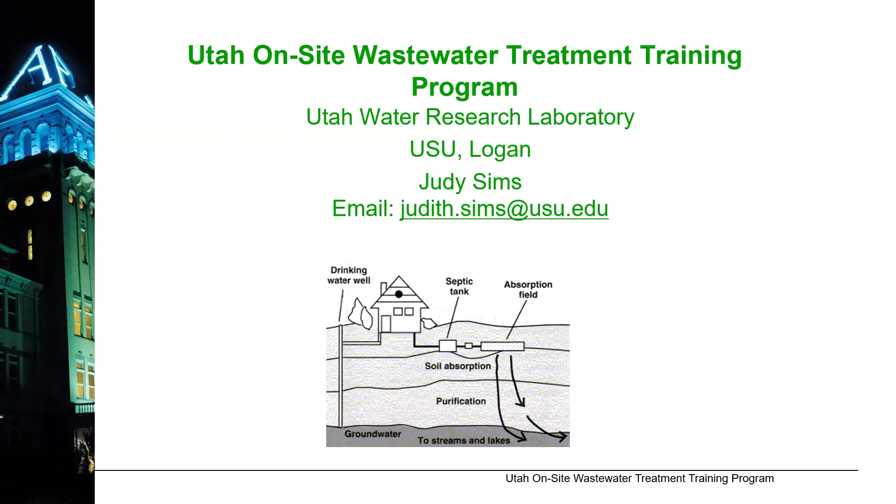So, oh, yes, please change the slide.

So, owning a septic system, compared to some of the other speakers, we've been concerned about water quality of surface waters, but here we're using human wastewater. So we're really concerned about human health with the operation of septic systems. And so if you're not hooked up to a centralized sewage system, it's your responsibility to operate and maintain your own mini treatment plant. So we take care of our wastewater, we protect you, your family, and your community. And primarily, since we're looking at human waste, we're looking at contamination from disease-causing organisms. And then, as Emily just mentioned, the effects of nitrates on infants.

Excessive nitrates in drinking water, if a baby ingests it, can change the hemoglobin to a form where the baby can't take up oxygen. So the disease is actually called blue baby syndrome. It's not good. Your baby needs oxygen, right? Okay, so please change the slide.

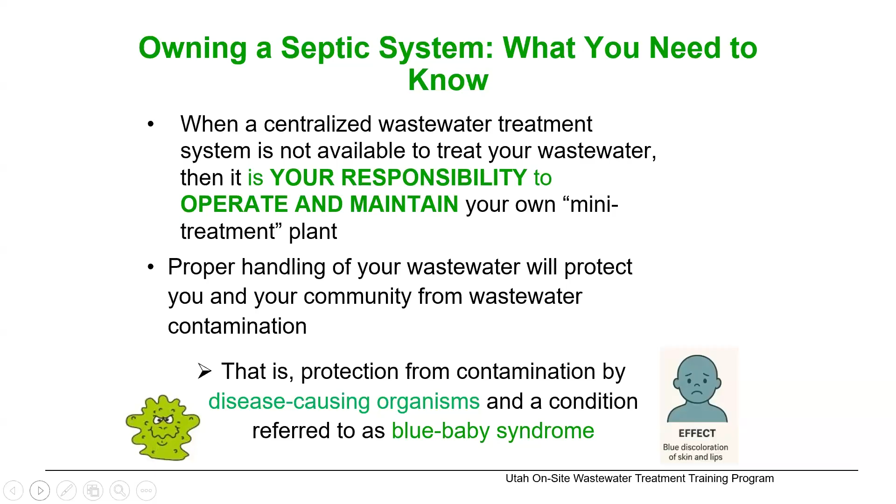So it's a treatment system. And lots of times we think of just getting rid of the wastewater, but we're actually treating it. So it comes out of the home, it goes into the septic tank, and the septic tank is the first step of the treatment where we separate out the solids. We have the floaters and we have the sinkers, and we have some anaerobic digestion, which starts the digestion of the organic materials from your kitchen and your toilet wastes. So that starts the digestion, and then it goes out into the soil.

And the soil is where the next step of treatment is accomplished. We have good microorganisms living in the soil, and they consider the organics coming from your waste as food. And so they degrade it and break it down into carbon dioxide and water. Pretty good stuff. And also in the soil, we have the absorption of some nutrients. And the pathogens, those disease-causing organisms, they can die off in the soil if we make sure they're not washed through the soil, or they can be eaten up by the good microorganisms.

So what kind of drain field do we need? We do a site evaluation. We come up with whether it's a suitable soil. So we have treatment and we have disposal. So our suitable soil in our drain field is one that's not too fast, so there's no time for the treatment to occur, and not too slow, so that it doesn't move through fast enough and it might back up into your backyard or into your home. So please change the slide.

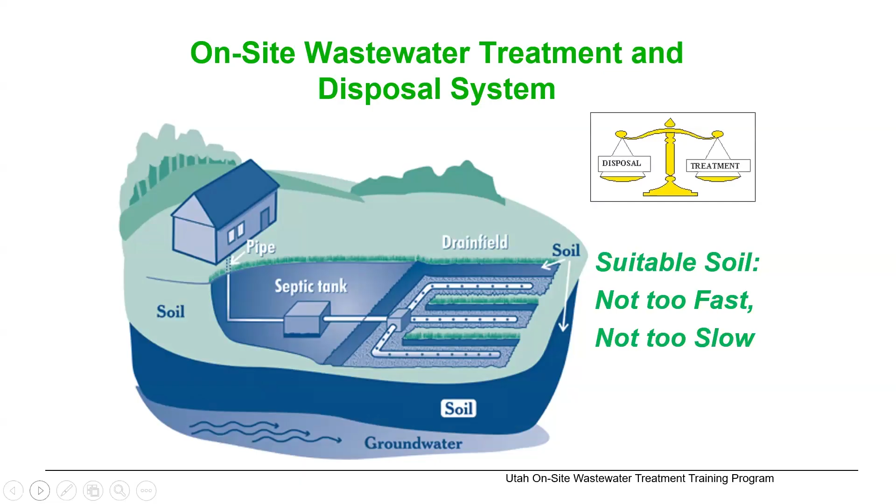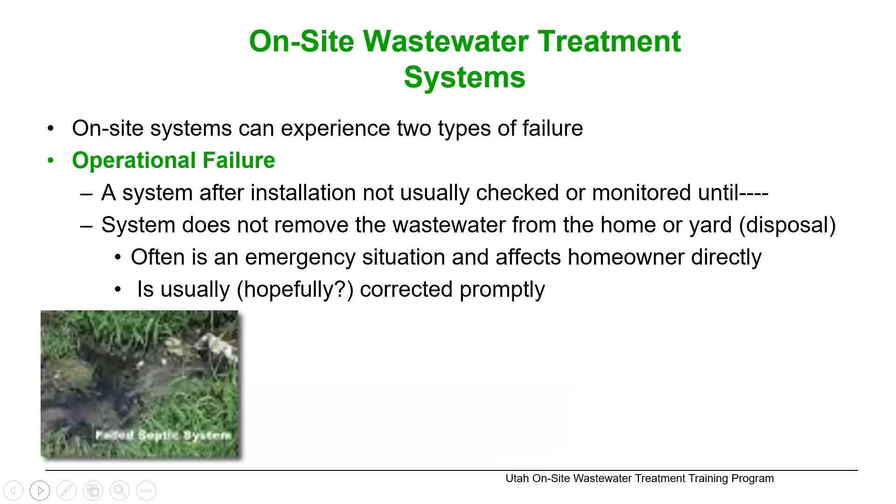And so we can have two types of failures. We can have that one where it's not disposing it. It backs up into your home or your yard. It's an emergency situation. We hope that it's corrected promptly. Another problem with this is if it's on the surface, it can then be runoff into surface waters and affect the surface waters. So that's the operational failure. The second, please change the slide.

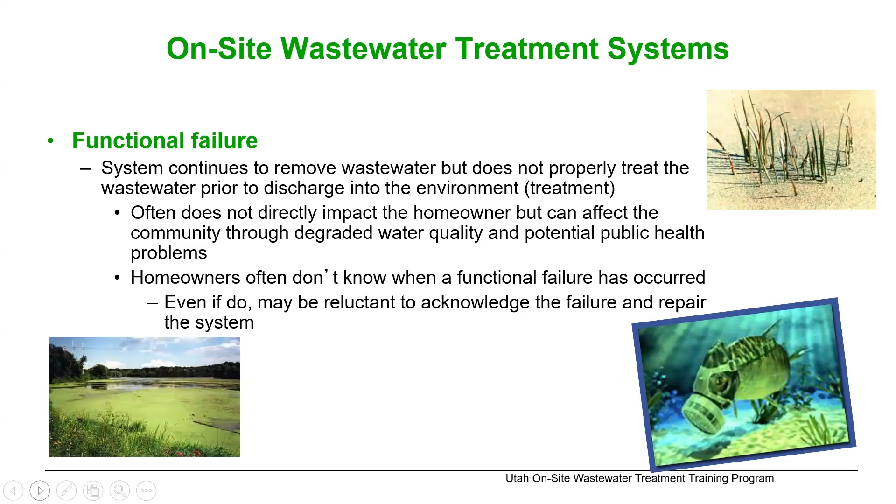And the second one is functional, where it's good for you. The water is moving away, but it's moving through too quickly, so we don't have time for treatment to occur, and we can affect the community's water quality. So you might not know this. The water's going away very well, but in some cases, if it is affecting surface or groundwaters, you might be asked to upgrade your septic system and get a more complex one that provides better treatment.

Change slide. So we have two big problems. One is the system is designed, so the person you hire to design your system, they come up with the daily maximum flow.

And they also size the septic tank based on the expected daily flow out of a certain sized home. And this maximum amount of wastewater has a safety factor to it. So we don't want to always put out that maximum amount, but we have a safety factor for Christmas when all the kids and grandkids come home or any kind of surges into the system. So that's the first thing you have to remember, is that your system is designed for a certain amount of wastewater per day, and you don't want to exceed that.

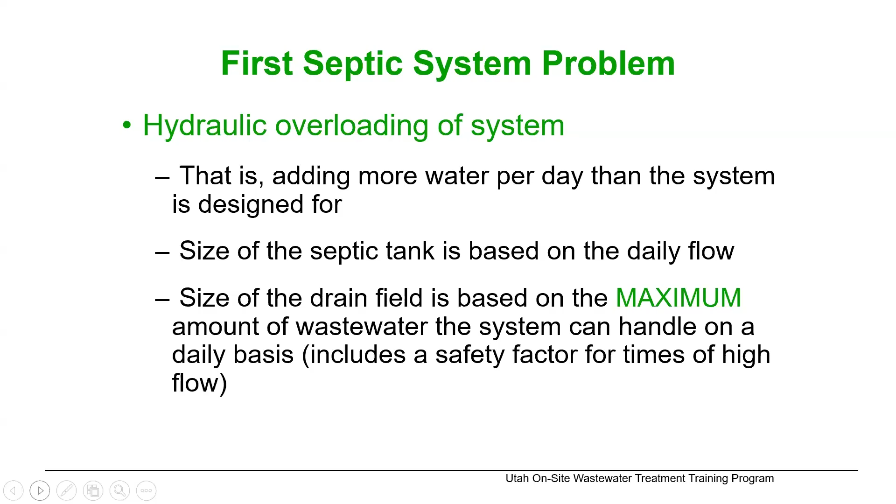Change slide. So, for example, you have a three-bedroom home, you have five people living in there. Based on the Utah regulations, it says the maximum daily flow rate is 450 gallons per day, and you would have to have a septic tank that was at least 1,000 gallons in size. So the average flow, based on lots of studies and monitoring we've done in Utah, is about 45 to 60 gallons per day. So the daily wastewater for these five people would be 225 to 300 gallons per day.

But if you have leaky toilets and faucets, that can add up to as much as 200 gallons per day. Or if you have lots of showers being taken, you have teenagers who take showers until the hot water runs out, or you do a lot of loads of laundry in one day, you can exceed that daily flow rate and then lead to system failure, both backing up perhaps or moving the wastewater too fast through the soil before it can be treated. Change slide.

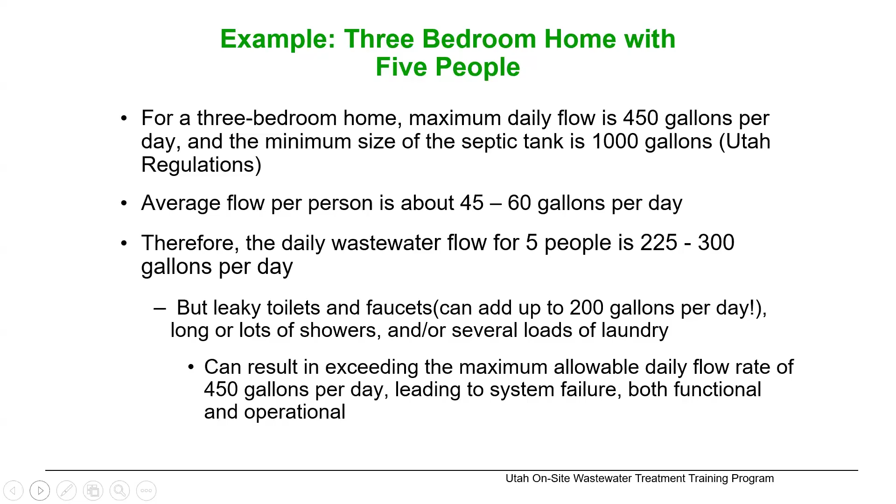And it's really important for the scum because the scum starts building from the top down, and if it slips out into the drain field, it especially has adverse effects because it clogs. You can imagine oil and grease would clog the bottom of the trenches and prevent the wastewater from going into the soil to be treated, and also it prevents the flow of oxygen into the soil.

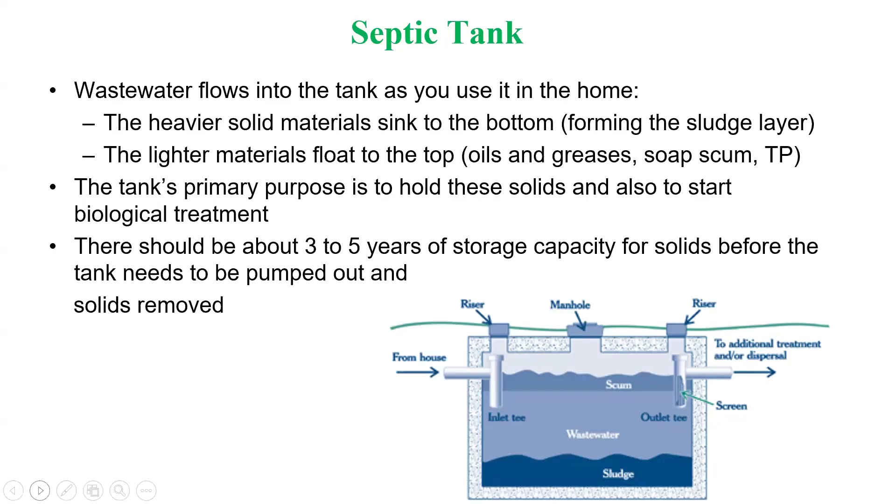So if you look at that septic tank, there's observation ports over the inlet and the outlet, and then the pumper would come and pump through the manhole. You should have risers over the inlet and the outlet so that the pumper can look and see if they have to repair those inlets and outlets when they pump it. Change slide. So the solids, like I said, it takes about 2 days, and there's beginning the degradation in the tank. So about 50% of the solids are actually broken down in the tank.

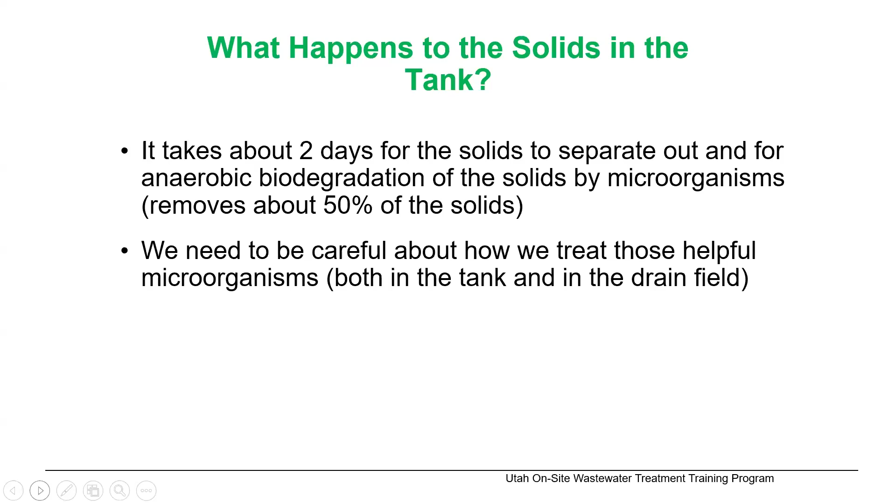And now, since the whole system is biological, microbial activity, we need to treat our bugs nicely. So please change the slide. So we don't want to use a lot of antibacterial cleaning products. We don't want to kill off our bugs. We don't want to hydraulically overload the system, so we know all about conserving water. I'm sure you have lots of information about how to conserve water.

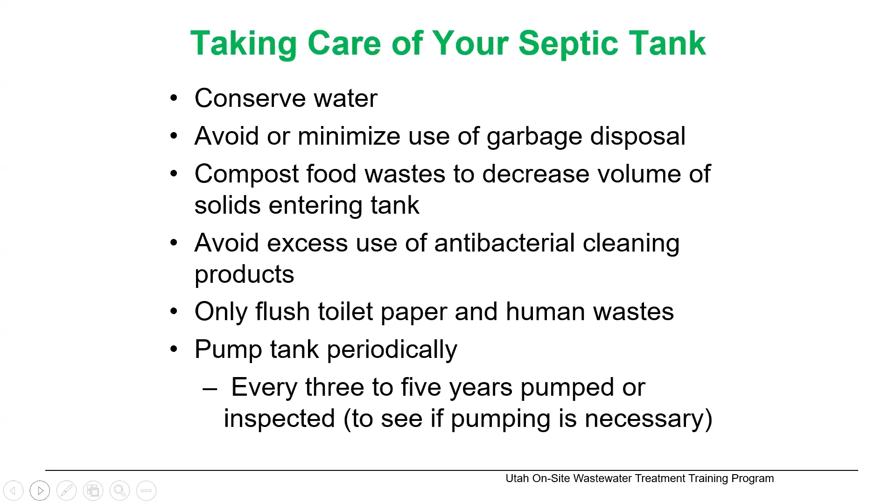We want to avoid putting excess solids into the septic tank, so avoid or minimize use of the garbage disposal. You can compost your food waste, and you can also scrape your oil from your fry pans with paper towels and put it in the trash. In the toilet, the only things you should flush are toilet paper and human wastes, and then it should be pumped periodically. Change slide. So make sure you don't dispose of any non-biodegradable solids into your septic tank.

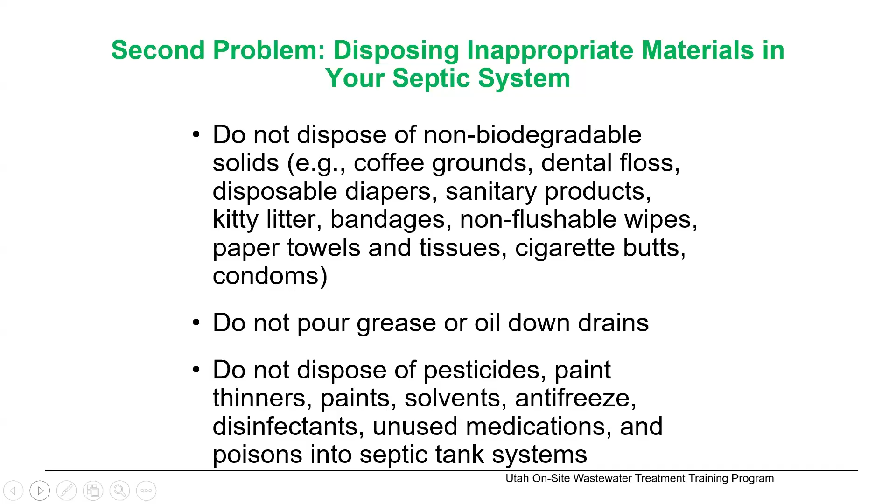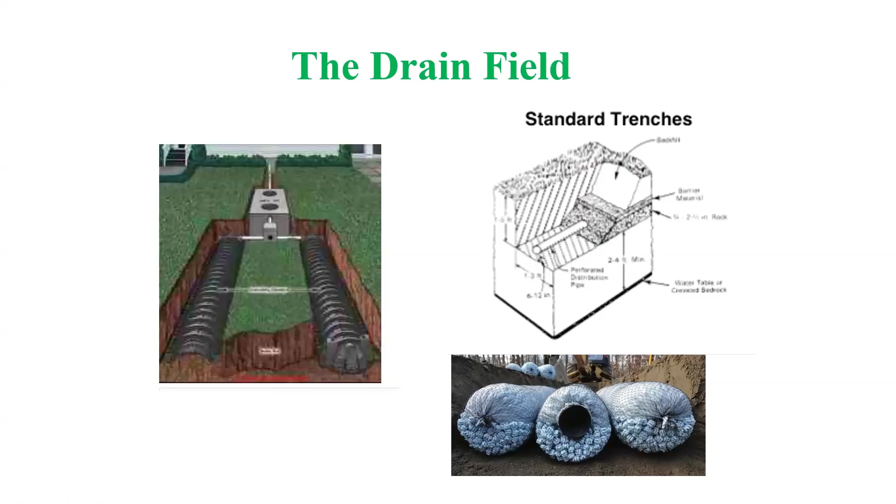Change slide. And you've got about 3 minutes left, Judy.

Okay, so taking care of your drain field. Now those microorganisms that live in the drain field need oxygen. So you don't want to compact the soil. You don't want to build a structure on it. You don't want to cover it with concrete or asphalt. And then to prevent moving contaminants to the groundwater, you don't want to over irrigate. We like to have a nice green lawn, but you don't want to leach contaminants to the drinking water.

You want to put grass on your drain field, not trees or shrubbery where the roots can plug up the lines. And since it's designed for a certain amount of wastewater per day, you want to keep the surface runoff away from your drain fields.

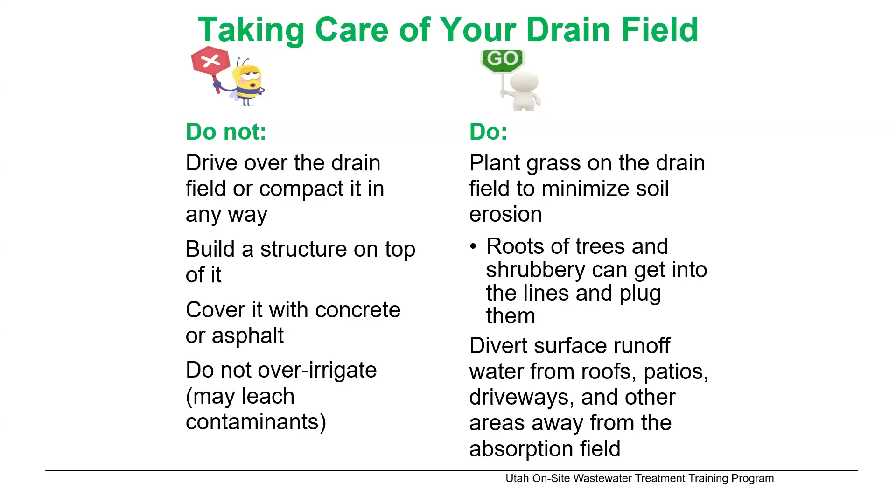Change slide. If the drain field fails, when the person designed your septic system, they should have set out a part of the area where you have your drain field, but they are also required to identify another piece of land on your property for a replacement area. So in case that first drain field fails, and it might after 20, 30 years, you can build another drain field. So you need to know where your replacement area is, and you need to protect it.

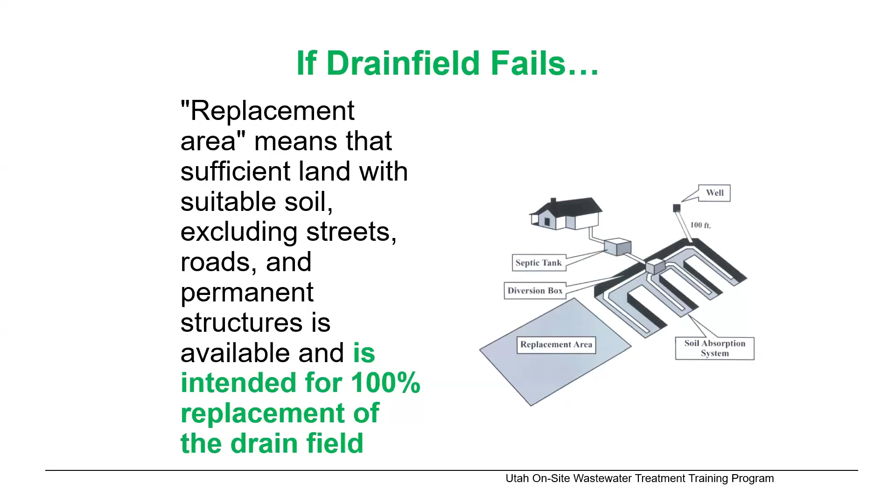You need to not compact it. You don't build on it. You need to keep it open. And so that if that first drain field fails, you have that replacement area. And that is a requirement for getting a permit for a septic system, is to have that replacement area.

Change slide. So warning signs of failure: if you have a private well, that's been mentioned before, you can have it tested, and you want to see if there's any fecal coliform or E. coli bacteria in there. And if that is present, that means there's a presence of feces, and that means there could be disease-causing organisms. Or you can have it tested for nitrates, which could adversely impact infants. And you can have this done at your local health departments.

Another thing, if you have surfacing wastewater wet spots in the drain field, if the wastewater is backing up in the home, or you have slow draining fixtures, it's time to get your septic tank pumped. If you have wastewater odors in the backyard, that could mean that you have some surfacing problems. But the septic system should be vented back and through the roof, so there might be odors on top of the roof there, and that's okay because we have them vent back through the home.

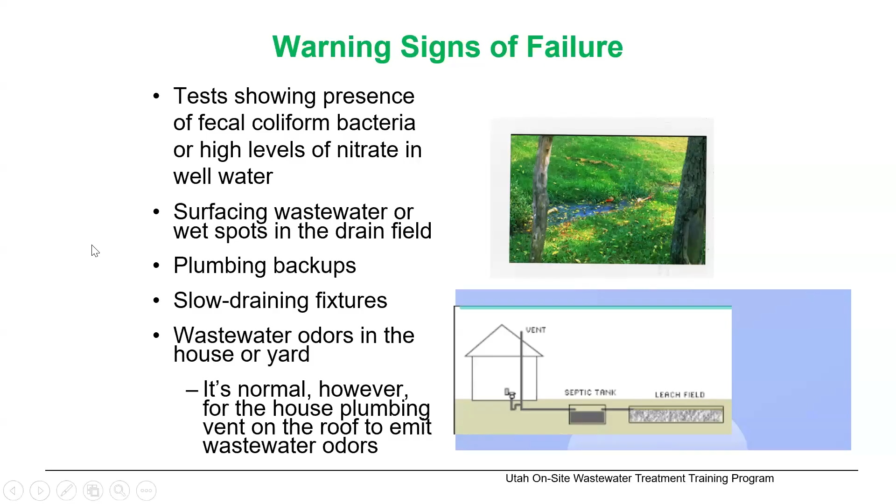And change slide. And just 1 more minute, Judy.

Okay. Alternative systems. In some cases, some of you might have had some limitations. Groundwater, bedrock, just not enough separation distance because you need enough suitable soil. You don't have separation distances from, let's say, lakes or streams, or the soil at your property is too fast or too slow. There's a possibility that you can have a more complex system.

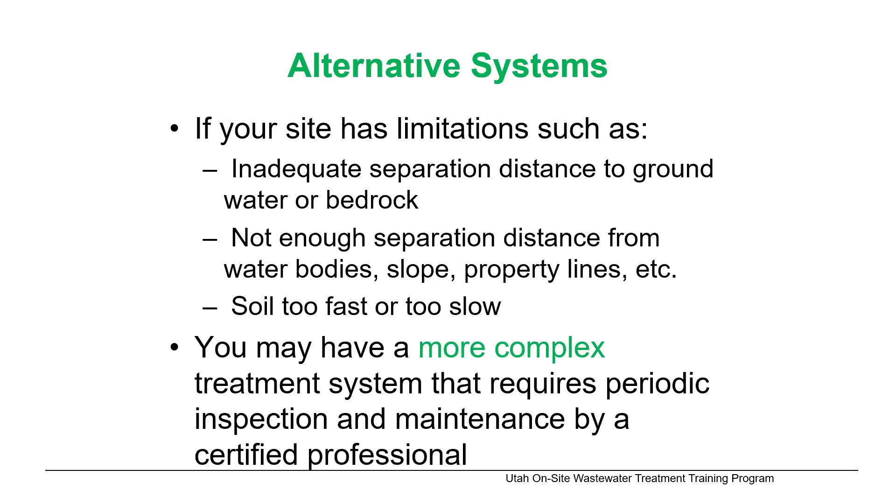And if you have a more complex system, then you have to have inspection and maintenance by a certified professional. So some of you might have alternative systems. It's not very common, but if your site does have limitations. And change slides.

So just to finish up here, there's help out there. Your local health departments have certified, licensed environmental health scientists that can help you with any problems that you have. There is money available through the Division of Water Quality for repairs and replacements of failing systems that you can apply for. There is an income limitation on that, but there are available funds for that.

And there's also funds if you're up in the Tri-County area in Roosevelt, Vernal, they also have another pot of money that you can use for repairs and replacement. And also, if you have any problems, you can go to the Division of Water Quality On-Site Program website, and you can get a list of certified on-site wastewater professionals that have been through our training program certified by the state, and they can help you.